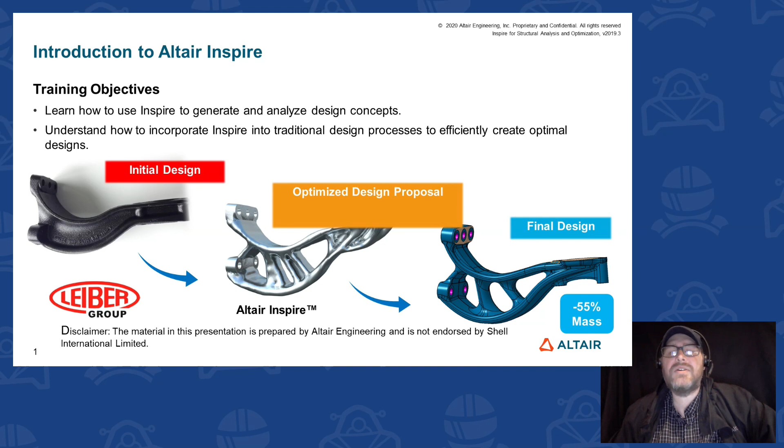So using Inspire, and we're going to show you how to go about doing this, you can take the original design. Inspire will intelligently, through a simulation-driven iterative process, determine the material that's necessary and the regions where material is not necessary. And then an engineer can take this information, engineer a part that in this case is a 55% mass reduction from the original design.

Another thing Inspire can do for you is make sure that we're adhering to design for manufacturing, a critical part of any design process. The best, most designed part ever, lightest, strongest part is completely useless to us if we can't manufacture it. And so Inspire allows us to include manufacturing constraints that guarantee that whatever design we ultimately come up with, it can be manufactured with our desired manufacturing process. So this had a tremendous weight savings and was manufacturable.

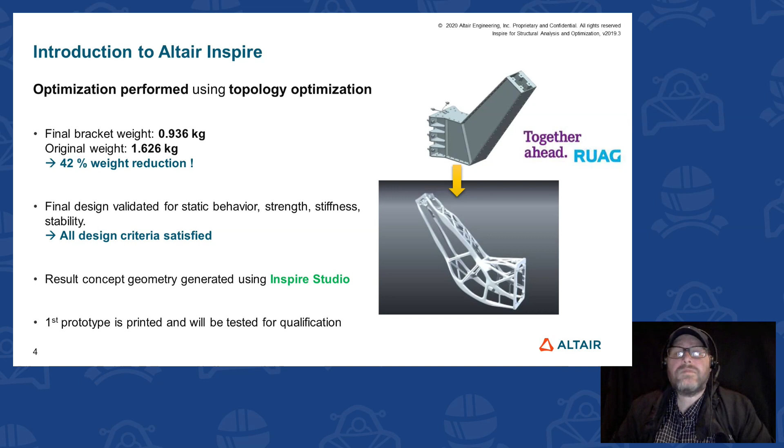So, as I said, enough of the slides. Slides are good as a brief introduction, but from here on out, we're going to go full-on demonstration, and the information that I show you should be enough to get you up and running with Inspire. So let's take it from this. Let me clear this out. So before we get into loading up a part, let me just give you a brief overview as to the structure, the setup of the software.

Now, when you run it for the first time, whether you get the free student edition or even better, a sponsorship, it's going to load up like this, and you're going to see the screen like this. One of the very first things that I always do is I come up here to View, and I turn on the model browser and the property editor. And as we get into these designs, you're going to find the invaluable information that's going to provide you right here. And yes, we lose a bit of the graphic real estate as a result of having them up, but the benefits that we get, I feel, far outweigh the loss, a little bit of loss of the screen.

So along the top, we have our pull-down menus and our ribbon selectors. We, of course, have our file pull-down where we're going to be able to create a new or open a recent. We'll see all my recents here, save things, do screen captures, alter our preferences. Edit, we have our undo and redo, cut, copy, paste. View, where we can manipulate some of our views, turn things on and off, and we do support Python as a scripting language. And then the rest of these are what we call ribbon selectors. So in kind of the way that Windows has gone, we've gone to a ribbon-based structure where each one of these different sections is going to represent a different type of manipulation within the model.

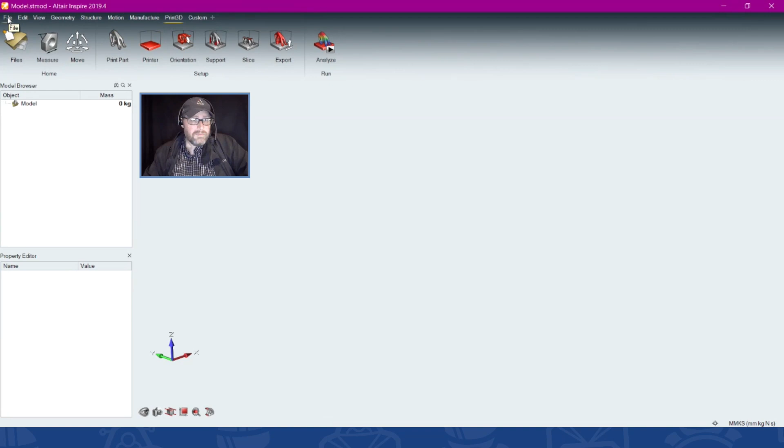But that being said, let us actually open up a model and let's get to work on this. Let's see what we can do with Inspire. So I'm going to come here. I'm going to open up a model, and just to show you, when I come to open a model, these are all of the different file types that we support. And we support the native file for any of the popular CAD systems that are out there, as well as some intermediate formats, with IGES, STEP, Parasolid, STL. But I'm just going to open up this Parasolid file that I use for demonstration purposes. And this is the file that we're going to kind of walk through the entire analysis and design process.

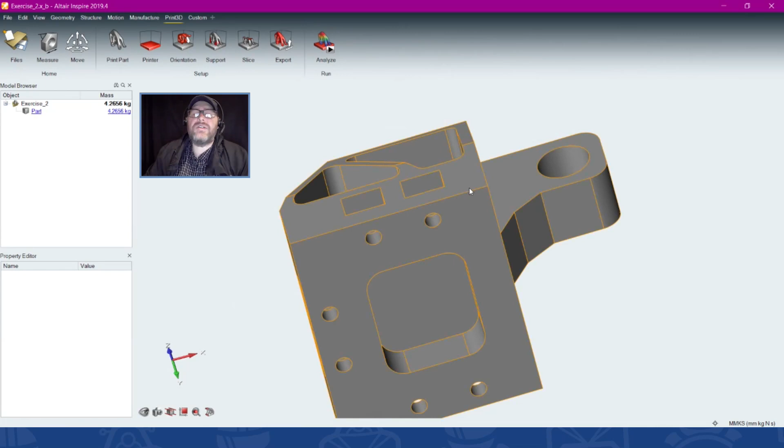So this is, if you remember that slide that showed the aircraft door hinge, this is the bracket, holds it both to the frame of the plane. Two of them are going to be aligned like this, mounted to the frame. And then two of them will be aligned like this, mounted to the door, and the aircraft door hinge will mount between them and allow that kind of interesting motion you get from an aircraft door, where it kind of comes in, tilts, goes out, and lays up against the aircraft.

And we want to see if we can improve this design. Ultimately, we're going to take this to an optimization and come up with some sort of lightweight but strong design. But before we do that, it is important, at least in the case of this part, to understand where we are at right now. We want to see the behavior of this part as the design is, and then use that information to help us build an optimization and understand the results of an optimization to make sure we're creating a better part through optimization.

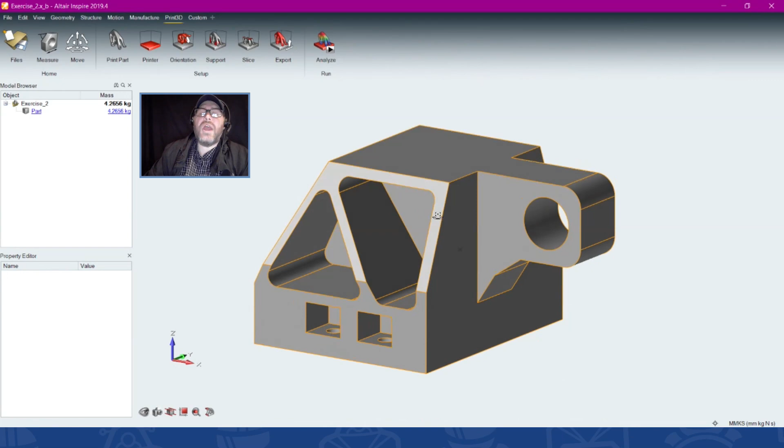So before we get into that, one of the things that people always are going to want to know is how to manipulate the model. Inspire has its own mouse manipulation parameters, where I can hold down the middle mouse button to do what we call a trackball rotation. It's rotating around that little X in the middle of the screen, and so I can rotate it like that. Holding down the right mouse button gives me a pan, so I can move it around.

And then using the scroll wheel to zoom in and out, pulling the scroll wheel towards me zooms in, pushing it away zooms out, using the pointer as focus. So whatever I hold my pointer over, that's what I'm going to zoom in on.

Now, any GUI-based software is going to have its own mouse manipulation, and it seems like every single different software out there, whether it's an FE software or a CAD software, seems to have their own different take on mouse manipulation. Everyone does it a little bit different than everyone else, which sometimes makes it rather difficult to move from one software to another. And if you've ever used multiple softwares, multiple CAD softwares, or CAD and FE software, you know exactly what I'm talking about.

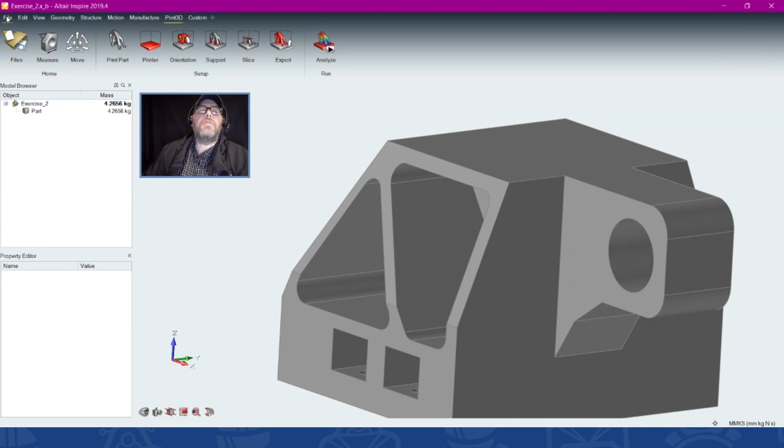But we want to make the transition from CAD to Inspire as seamless as possible. So all you need to do is come to the File pull down here, come to Preferences, and come to Mouse Controls, and you can see we can change the configuration of the default mouse, where I can make the right mouse button do whatever I want it to do, middle, left, and right, and then my manipulators here, Control, Shift, and Alt.

Or even better, if you're familiar with the CAD system, all you have to do is come up here to this default, select it. We're going to get a list of all the popular CAD systems there. And as soon as I select one of them, it's going to change all of the buttons to that manipulation style for that particular CAD system. So if you're moving from SolidWorks or Inventor or CATIA or UG or Pro-E to Inspire, that little change is going to make it a seamless transition, because you'll feel right at home as you try to manipulate your model and screen, and you won't suffer from the problem trying to move from one scheme to another.

Now, I don't use a CAD system, so I'm going back to the default. Click OK, and I can rotate it like this.

To do an analysis, the very first thing we're going to need to do is establish a material specification for this part. And you'll see over here in my model browser, if I click the part, it's going to give me a whole bunch of information. It tells me the mass of the part, 4.27 kilograms. And if I come down here, it's made out of steel. Well, this is an aircraft part, and very little in an aircraft is made out of steel. When it comes to aircraft parts, we much prefer our friend aluminum.

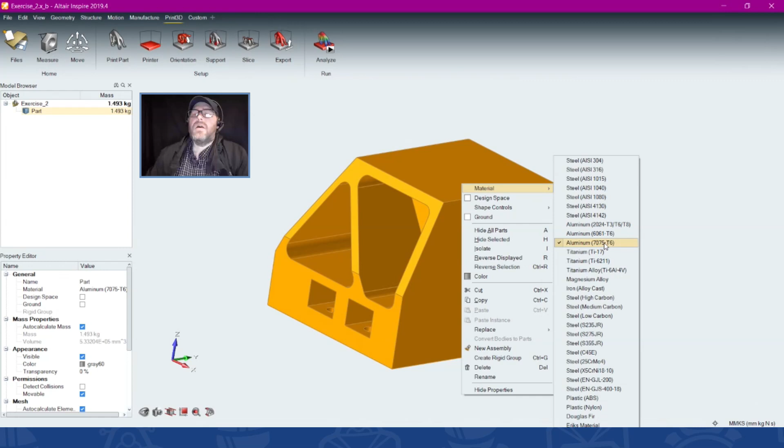But if you have a special material, or you've got the exact specifications for your material, then what I encourage you to do is come here to the Structure ribbon, come to Materials. By default, it's going to list all the parts and the material that they're made out of. I can look at the material library that comes with software, and then I can come here to My Materials. See, I have a number of custom materials for Erik's material, material 1, material 2.

All I have to do is click plus. It adds a new material to the bottom. I change it to reflect the Young's modulus, the Poisson's ratio, the density, the yield stress, and the coefficient of thermal expansion for that material. And then I have a brand new custom material.

And you see for Young's modulus, which is a pressure, it's asking for MPa, so megapascals. And the reason it's asking for that is because I am in, if I look down here in the lower right corner, I'm in the MMKS, which is the millimeter Newton second scheme with a kilogram mass.

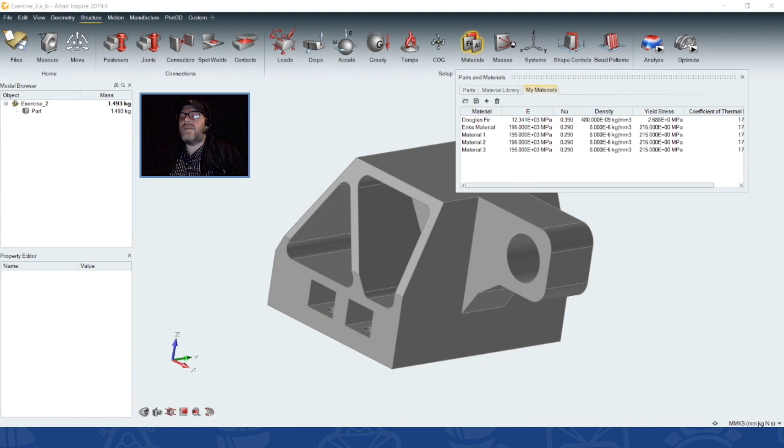If I select down here, I can change this to any of the popular unit schemes. So if I want to be working in meters, I can just come up here and pick meter Newton second. If I want to be working inch pound force second, I can do that. And all I have to do is select any of these. It will automatically update everything about my model, the material specifications, the overall sizes of the part, the loads, temperatures, everything will be automatically adjusted.

I'm going to continue working in millimeter Newton second units, so my stresses or Young's moduli will be in megapascal. When I right-click to material, you see new material 3 is down there at the bottom. By all means, add your custom materials to this.

I'm content with my steel here—I'm sorry, with my aluminum here. You can see I gave it a relatively large weight savings already: as it was set with steel, it was 4 point something kilograms, and by changing it to aluminum, I brought it down to about 1.5 kilograms.

Now that the material is defined, I need to begin to set the parameters to do an analysis on this. This is going to be a linear static analysis, the type of analysis that Inspire can do, utilizing the OptiStruct engine in the background, so we can be 100% confident in the results we get out of here.

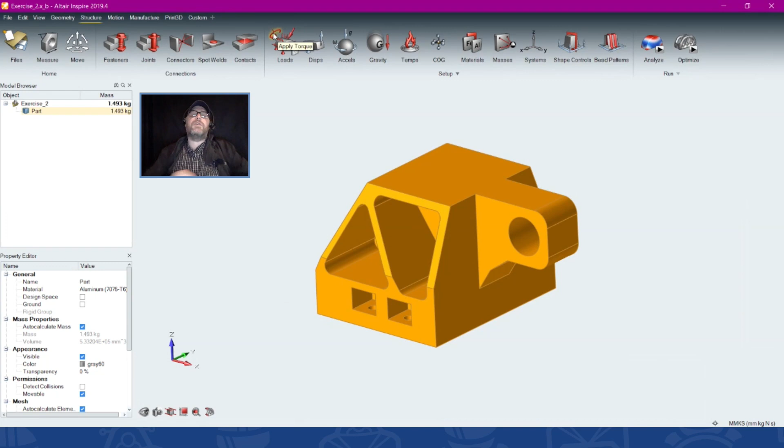We wanted nice, large, descriptive icons that told you exactly what function you were getting into. To include all the many functions within Inspire, we created these multi-function icons, which means loads, depending upon where I pick on the icon, gives a different type of load. If I click down here on the bottom, I get a support. If I click this arrow, I get a force. If I click here, I get a pressure. If I click here, I get a torque. So that one icon supports 4 different types of loads that I can put on here, and they're all very descriptive and obvious as to what they mean.

So my supports are going to be what holds it in place. If you're familiar at all with FE, you'd know this is a constraint. If I select my supports, my pointer gets a little modifier on it, a little cone, indicating that I'm now creating supports. It says I select a point, an edge, a face, or a hole. So I come here, and I can pick a face, an edge, a point, or a hole.

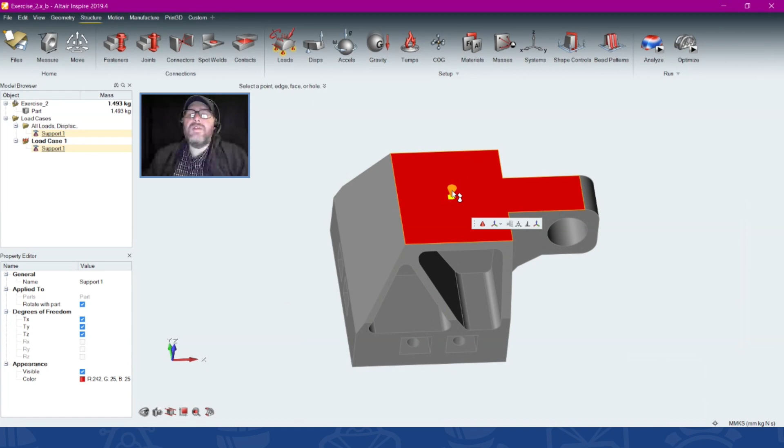I'll start by just picking a face. If I select that face, it's going to put that constraint icon right where I picked. But the fact that this entire face highlights red tells me that this icon is controlling this entire face, and it's rigidly held in place. That face is not going to move at all. It's as if I glued or welded this to something grounded, and the rest of it can deform, but it can't move.

Now, if I want to alter the configuration of that, all I have to do is double click on it, and I can free up any 1 or 2 directions, making a slightly more complex or more robust constraint. If I click here, that arrow turns green, telling me this part is free to move in what amounts to the Y direction. So we get these roller wheels on here showing us the direction it can move in.

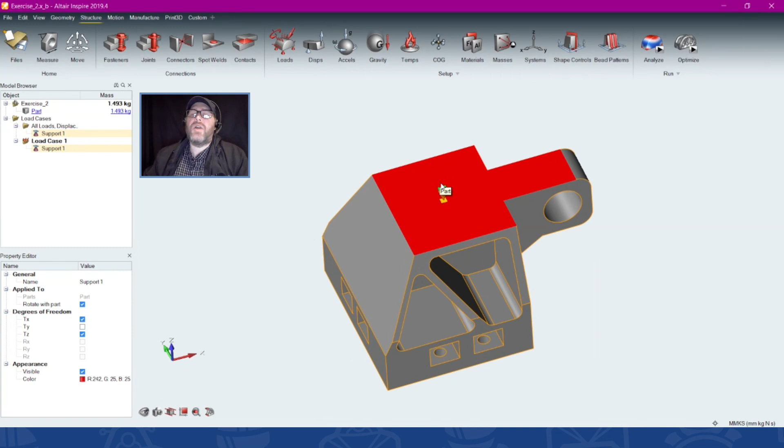If I double click on this again and grab my move support, I can orient that however I want it to be. I can rotate it in increments of 5 degrees, or type in a specific value and it will orient to that. Now you see the roller wheels are pointing to 37 degrees off of the Y-axis—so I've altered the orientation of that.

If I double click it again and pick this arrow as well, now it's free to move in plane, but not out of plane, and that's represented by this little caster wheel here. So even our icons are going to highlight and show you exactly what that is doing, so there's never any doubt as I look around my part. And I could do the same thing to a line or a point.

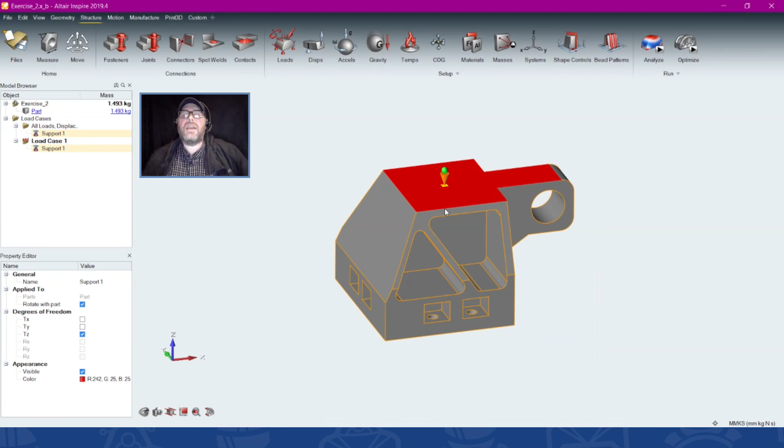But actually what I want to do, I'm going to highlight that and click on it, and it's going to go away. What I want to do is simulate how this part is mounted in the aircraft. And the way that this part is going to be mounted is it's going to bolt through these 6 holes here. I'm going to put my supports, come back to supports, and now pick a hole.

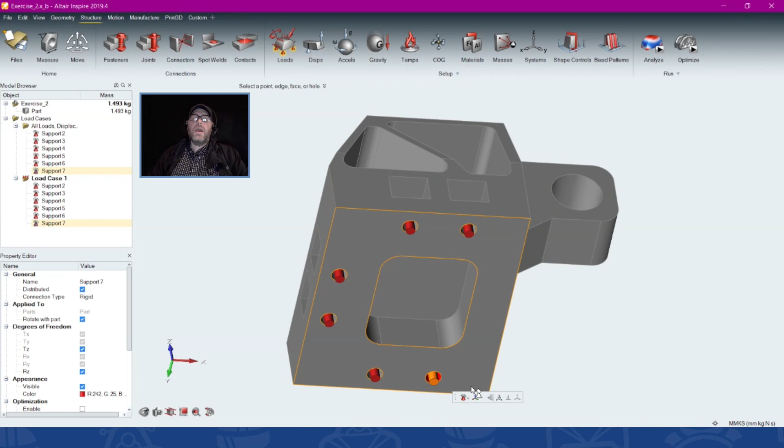You see I get the little modifier showing it's a hole, and I can click in these, and I get a slightly different constraint icon. The reason it's slightly different is because Inspire is recognizing that these are holes, and holes provide a unique constraining opportunity, because most of the time holes are constrained with either a pin or a bolt. And if constrained in that manner, that means it can never move perpendicular to the axis of the hole.

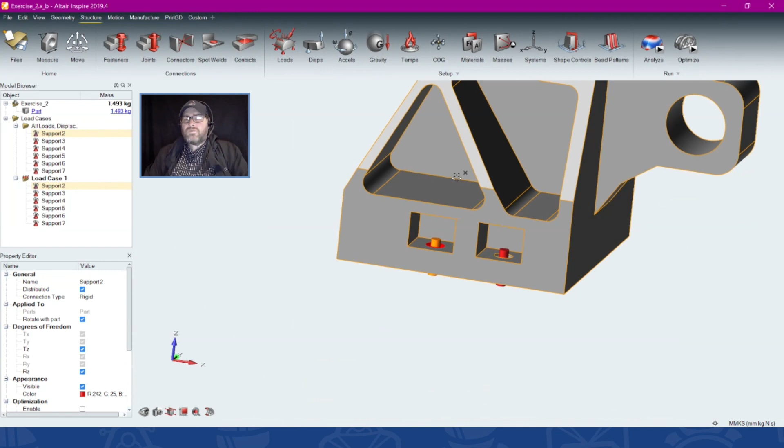But if I double click on it, you see it will allow me to free up rotation about the hole, and free up translation along the axis, but never translation normal to the axis. So I can develop a very accurate representation of whatever I'm using to constrain this part in place. And now with all of these on the holes, my part is nice and rigidly constrained, but the rest of it is free to deform.

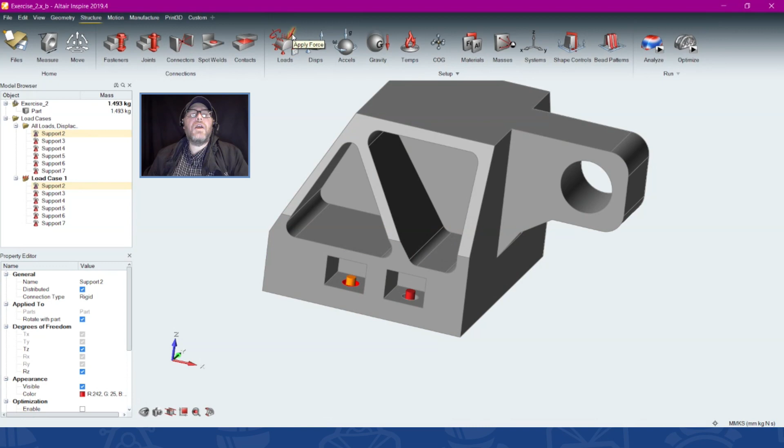Okay, so with this now, what I'm going to do is come back to my loads icon. And with my loads icon, I'm going to grab this force here, and take that and come over here, and just like with the constraint, I can apply this to a point, an edge, a face, or a hole. If I apply it to a face, a surface, again it's going to put that point there, that force, where I clicked it. But because it's all red, it's going to apply that force to the entire surface.

And this is the value of that force, 2224.110838 newtons, and that's going to be spread out evenly across that entire surface there. If I want to change the direction, just like with the constraint, I can click the move icon and rotate, orient this any direction that I want. Or if I don't know the angles, I come here, open this up, and I can put in the vector components. Now these are just for orientation, the magnitude is separate, but this will allow me to orient that in whatever direction I need to orient it.

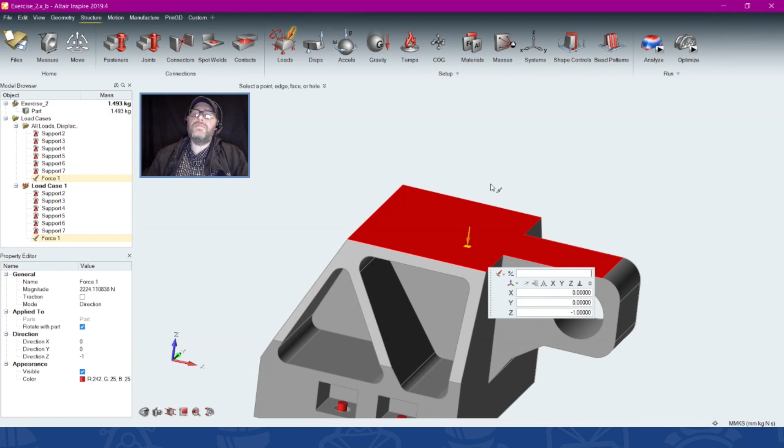I'm going to delete it though, because where I'm going to apply the load is actually in the center of this hole here. So make sure I'm on my force still. When I move to the hole, my mouse gets that little modifier showing me I'm putting a force on a hole. And if I click that, it's going to put a force right dead smack in the center of that hole. But the entire inner surface of that cylinder is going to highlight red, which means that force is going to be connected to and evenly distributed across the entire inner surface.

And I can orient this in any of the cardinal directions, plus or minus. The one I want is going to be Y minus, and then I can give it a value. So I'll type in, say, 2000 here. Click enter, and I get 2000 newtons. So I've just created a 2000 Newton load in the negative Y direction.

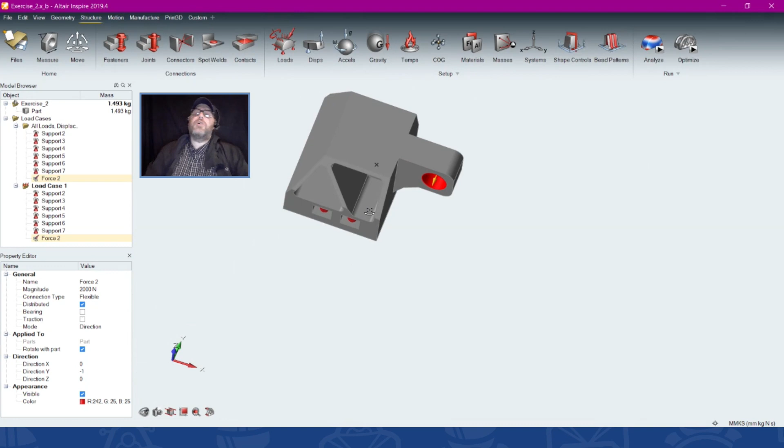We can see the vector orientation right there. And what this is going to do is represent a situation where this is mounted on the door and the door is open, so the weight of the door is going to be pulling down on this. And I'm going to see how this part behaves with that 2,000 Newton force pulling down on it.

But that's not the only situation this bracket can be in. The door is open and pulling down on it, or in flight, the door is closed, and the hinge is going to be exerting a force to keep that door tightly closed. And I want to represent that as well.

So I'm going to come back up here to my force. I'm going to click on that hole again, and it gives me another arrow, and it's in the right direction, but I needed to go positive. Now I can give this a force as well. It defaulted to whatever I put in as my default force.

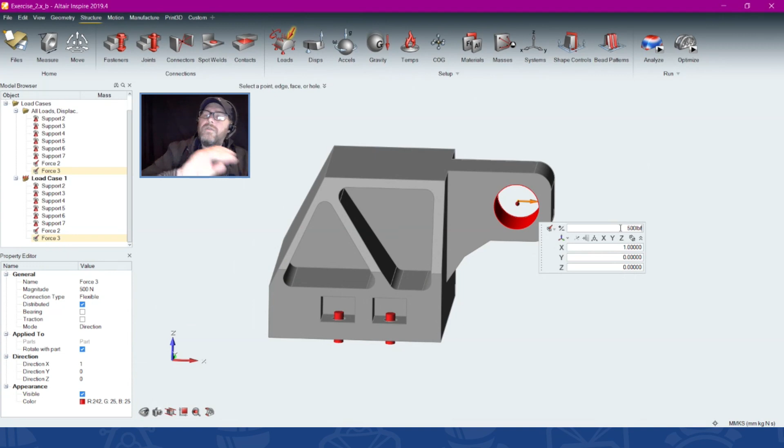But say, for instance, you don't know what that force is in newtons. You got this from somebody and they told you it was 500 pounds force. Well, if I come here and type 500, of course, and click enter, it's going to be 500 newtons. But if I do the same thing, if I come in and type 500, and then as opposed to clicking enter, type in LBF, the abbreviation for pounds force, and click enter...

...it will automatically convert that to whatever force unit I'm currently working in. So whatever unit I've got here, it's going to convert that, and that works for distances, times, masses, forces, pressures, all the different units we can possibly enter. It will automatically convert it to whatever unit system I'm currently working in. So it saves you a trip to Google to make the conversion for you.

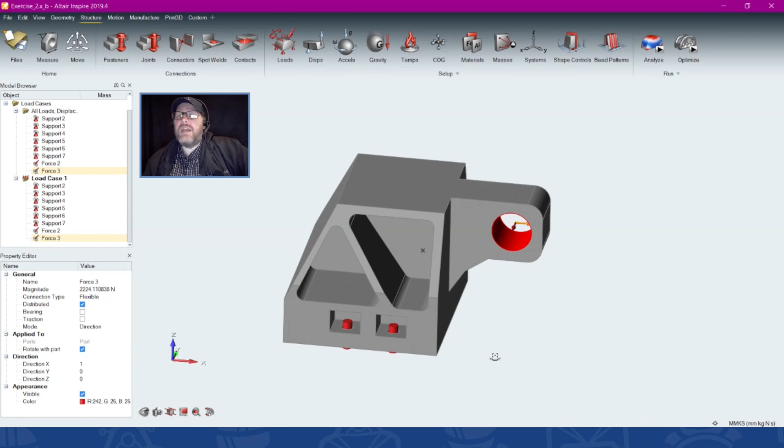So that's it. From here, I could go and run the analysis. But before I do, let's talk about some of the other ways I can load this up. This is just a standard point load. I can do a pressure load.

If I select that, it's going to apply that pressure to the entire surface, 1 megapascal to that entire surface. And now if I hover over it, it's going to tell me not only the pressure, but the equivalent force, 7,100 newtons, that's going to apply to that. So it takes into account the actual area of that. So let me delete that.

I can apply a torque. I can apply an enforced displacement. So let's say, for instance, I need to test this. We've got a part, it's sitting on an airplane, and I don't know the force that's acting on it when the doors hang open, and I don't really have a tool to measure that.

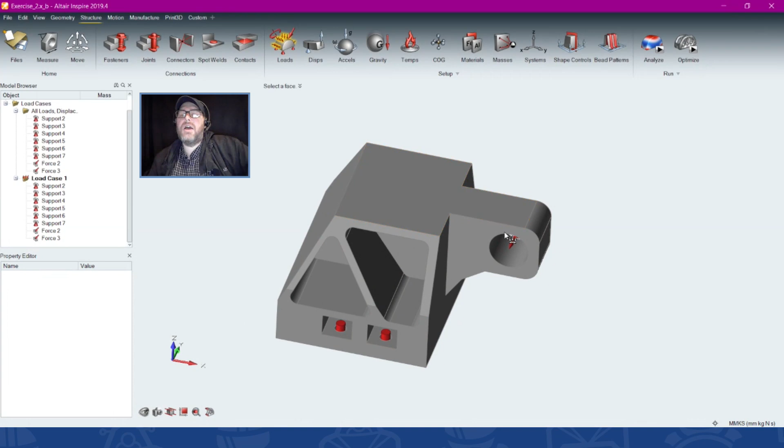But I do have somebody who can go out there and tell me that this point right here moves 4 millimeters in the negative Z when the door is open. I can click on enforced displacement, click on that point, type in 4 millimeters, indicate the orientation. And now what will happen is, even without any force on here, it's going to take that node and move it 4 millimeters, and then we can see whatever stresses result from that, not even knowing what the force is, but knowing what the displacement is.

I can do G loading. So G loading is going to be based on the gravitational acceleration. I can click that and say, okay, I want a 5G load on this part, and it's going to do that. I can do angular velocities and accelerations.

We'll get to gravity in a little bit. And I can apply temperatures. So if I put temperature on here, it's delta T.

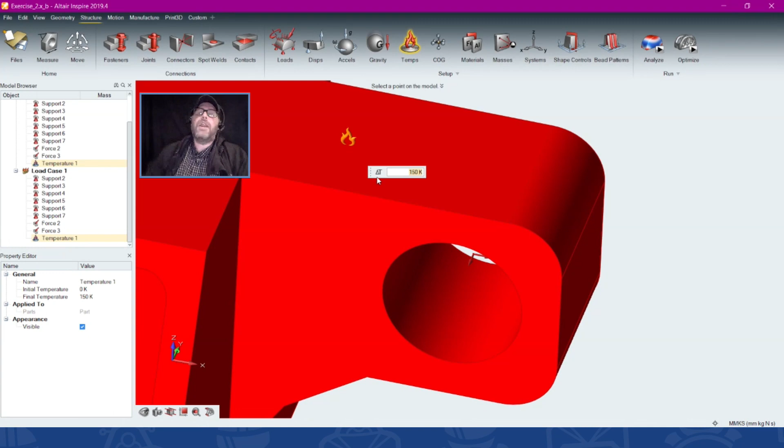So irrelevant of whatever temperature it's at right now, we just assume it to be neutral temperature. It's going to increase the temperature of this by 150K. And then as a result of that thermal load, we're going to get a thermal expansion. And because the part is deforming, we'll get a stress as a result of that. And if I had made that negative 100K, we get a contraction and we get stress as a result of that.

So we can add just about any type of force that you're looking to do. They do have to be static forces. We don't support dynamic forces in these static analyses right now, but later I'll discuss a way that you can do a kind of pseudo-dynamic analysis.

And then I can even come here and add non-structural masses. Non-structural masses are a tool when the mass of something is important, but not the direct configuration of it. Think muffler hanger - you go underneath your vehicle, there are hangers keeping your muffler from dragging across the ground. If I want to do a study on those, I don't need the complexity of the entire muffler system. I just need to know the center of gravity and the mass of it. I can put that center of gravity there, that non-structural mass, and connect it to my part, and analyze it by putting a mass there. It's another way of loading it up.

And that's pretty much it for the way that we load a model up. The next thing I do is come over here to Analyze. I'm going to click the little play button, and it's going to open up my analysis window. With my analysis window, the first thing I can do is name that analysis - very useful if you're doing multiple studies. I can control the global element size, and we'll talk a bit more about meshing. You don't have to worry about the meshing at all, it will take care of all that for you. But if you do want to control some aspects of it, we'll talk later about how you can do that.

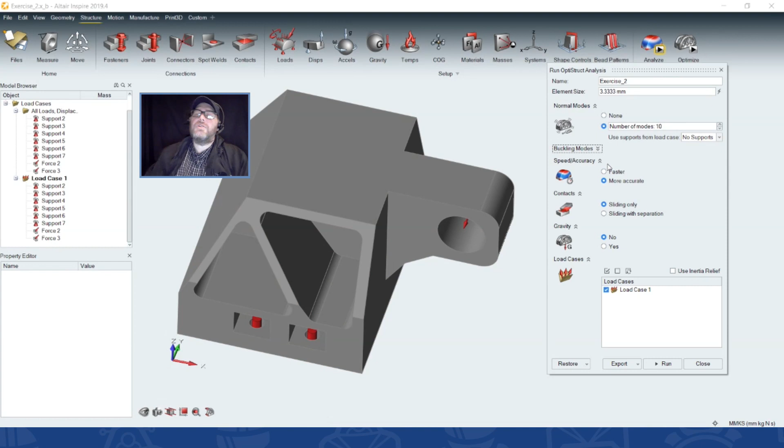And then I can do buckling analysis. So I can again request my buckling modes and which load case I want to use. Indicate whether I want it faster or more accurate. More accurate, if you're familiar with meshing, is going to provide a quadratic or second-order tetrahedral element - far more accurate, but takes a bit longer. Or I can go faster, which is a first-order linear tetrahedral element, which will get my result faster, but will tend to have more stress and less deformation because they are stiffer. So only do that if you really need some rough answers quickly, but not something you'd want to bank on.

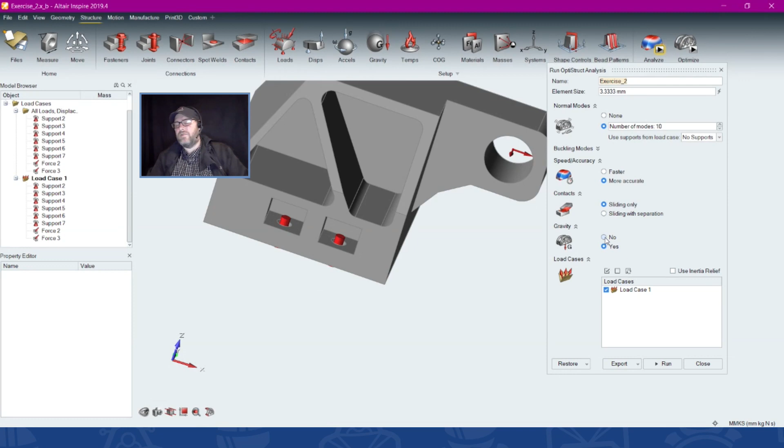We'll come back to contacts. Gravity - if I want to incorporate gravity or not, I can click yes, and now gravity will be included, but I need to make sure gravity is pointing in the right direction, so I can come back to gravity here. Orient that gravity properly, and it will default to the Earth standard gravitational acceleration. We can just go ahead and leave that. But this is a relatively compact little part - gravity is not going to have much of an influence or any discernible influence on it. So I'm not going to muddy the model up by including gravity.

And then I can come down and include the load cases. I see I've got one load case here. This load case is going to take all my forces, all my constraints, and run an analysis on it. But that's a bit of a problem. So coming back to here, I need to close this for a second. I said I had this indicating this would act when the door is closed, or be the force when the door is closed. This is when the door is open, but that can't happen at the same time. And if both of these forces are acting at the same time, I'm going to get some sort of vector result here, which is non-realistic. These forces can never happen at the same time. So before I run it, I need to come back here to my loads.

To this little chart icon here in the corner, and this allows me to create load cases. Load cases are essentially studies. I said I had a door open and a door closed. Well, I can click here, select the constraints or supports that I want, and then select the force I want, deselect that there, and now I get two independent studies. They will run in the one analysis that I do, but I will get two separate results, one for each of them. But more importantly, when I get around to doing my optimization, the optimization will take both scenarios into account into its study when it does it, still acting independently, but making sure that my part is optimized to support both of those load cases.

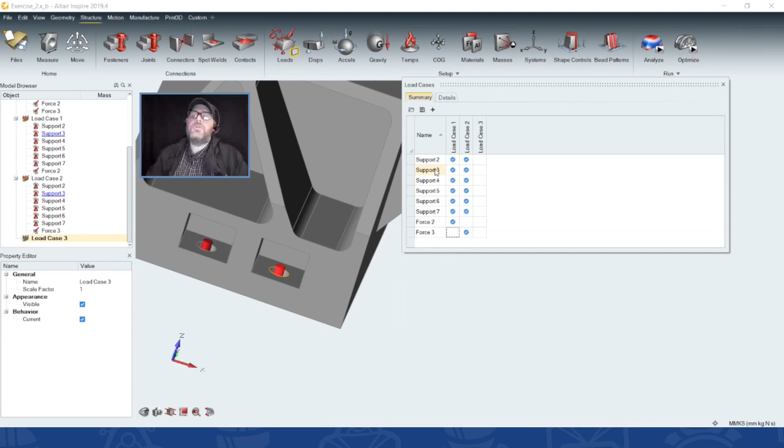And I can continue to add load cases as I want. So say I wanted to study it assuming bolt 2 and 3, my support 2 and 3 - let's pretend that they failed. So I won't even include them, I'll just grab the other 4 and that load right there, or force right there. And now I'm doing that study right there. And I can continue to add these as I see fit. And when I come back to my analysis, you see it includes all load cases and they're all turned on by default.

And from here, I can just run the analysis. So if I click run, it's going to pop up this little status window. And what's going to happen in the background is Inspire is not just a muddled together geometry-based element or meshing element analysis tool. It's actually a geometry front end for our high-end analysis, meshing, and pre-processing tools.

So what's going to happen is it's going to take this part and send it to our tool called SimLab, which is going to create a very, very high quality tetrahedral mesh. Then it's going to send it to HyperMesh, our preeminent preprocessor, which is going to set up all the parameters for the analysis, and then send it off to OptiStruct, our analysis optimization tool that we've been developing for 20-some-odd years now, to make sure that we get the most accurate results possible. So you're utilizing our high-end enterprise level software, but you're doing it in a very easy to use interface.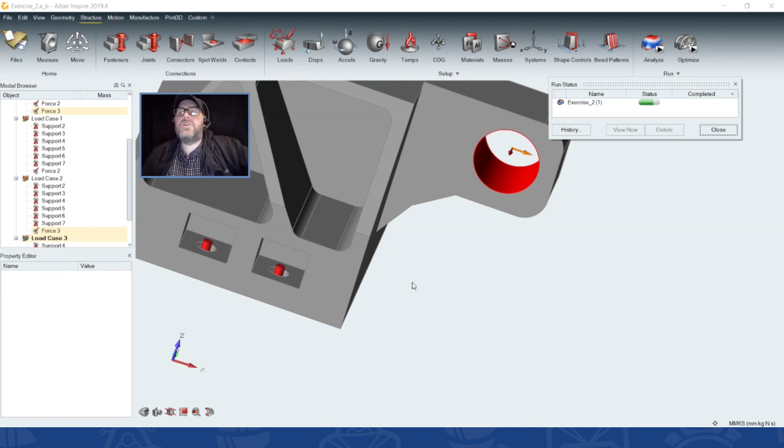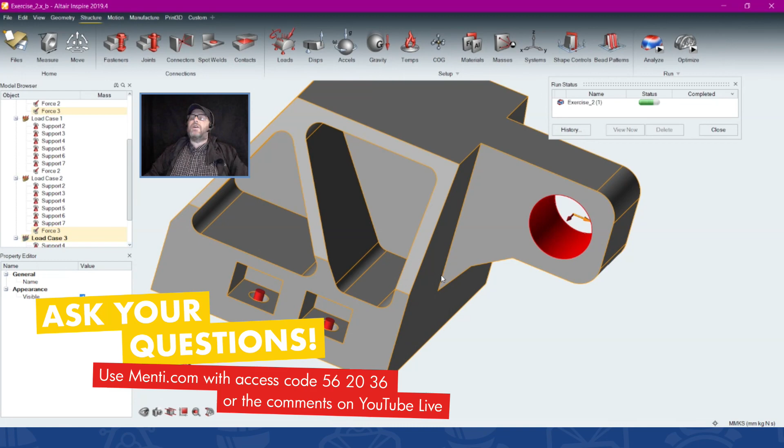And this should be just about done here. And as soon as it is, I'm going to get my little reward. A little green flag is going to pop up here, and that tells me that my analysis is done, and I can take a look at the results. What we'll do after that, we'll analyze the results. We'll determine from them where we stand with our current design, and then determine if this is appropriate to move into optimization and see if we can come up with a better simulation-driven design.

And there you go. Almost as if on cue, I get my little green flag. I click that. It takes me directly into the post-processing tool here, where I can see all 3 of my load cases plus my normal modes. I can see all the different result types I have: displacement, von Mises stress, percent of yield, factor of safety. My animation, where I can see how the part is going to behave.

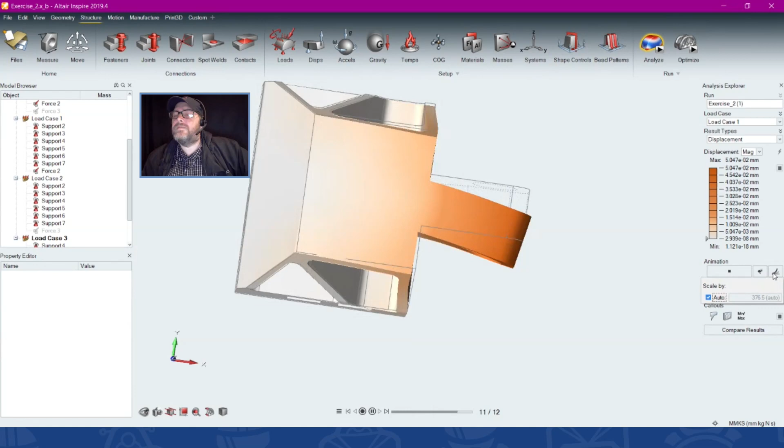And before you get a little concerned about this aircraft part, which looks like it's being made out of some sort of rubber, realize that we automatically scale up our animations. If we look here on our legend, we can see the maximum displacement we're getting is 5.047e-2 millimeters. So, 5/100ths of a millimeter, which obviously is not being represented there. We scale up our deformations so we can see them. And if I click this, you get scaling it up 376.5.

And the reason we do that is if it came up as a 1-to-1, this provides me almost no information whatsoever. To even see the deformation, I have to zoom in, and just looking at this isn't going to give me the information I need. So we take care of the trouble of scaling it up for you so that we can see the behavior of this. But no matter what your scale factor, these values here are 100% correct.

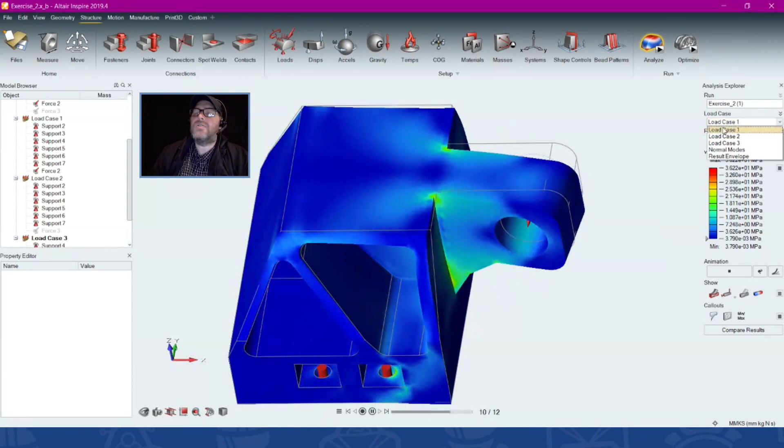I can come down to my von Mises stress, see the stress as a result of each one of my load cases and the behavior of each load case. And most importantly, I can come here and take a look at my factor of safety. So what factor of safety is going to do is compare the results that I have here to the yield stress value that I entered into my material definition. So if we come here and we look, aluminum 7075-T6 has a yield stress of 413.7 megapascals.

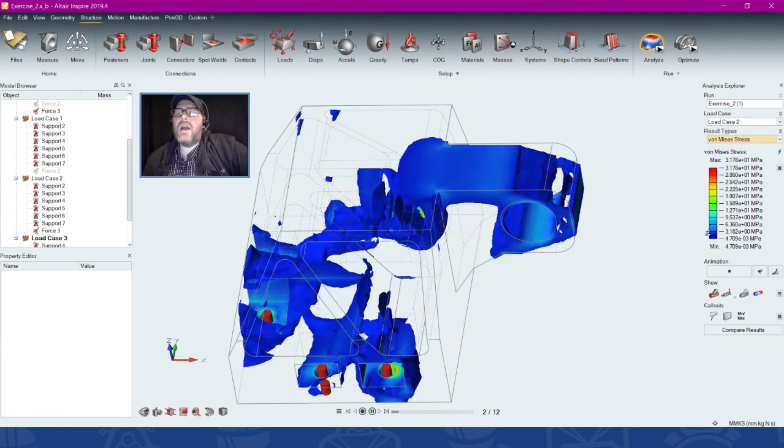And coming to factor of safety, I'm going to find out how many times higher or lower I am from that. Now I can use this little slider here, and let me come back to von Mises stress for a second. I can use this little slider to isolate values. You can see as I pull this up, it's getting rid of the lower stress values, allowing me to focus on purely the high stress values.

And if I change it to factor of safety, since for factor of safety the better things are higher, I can slide this down. And as soon as I get off the 6, the highest value on the scale here, the entire model disappears. So this is telling me my entire model has a greater than 6 times factor of safety. And while the initial thought for an aircraft part might be, wow, that's great, if only the entire airplane had a 6 times factor of safety.

Well, I'll tell you, if the entire plane had a 6 times factor of safety, you'd be lucky if you could bring luggage with yourself and the pilot, because that's all that's getting on that aircraft, because it couldn't possibly lift anymore. So a more reasonable factor of safety is typically between 1.5 and 2 times. And the fact that the thing has a 6 times factor of safety tells me one very important thing, and that is this part is way, way over designed. And there's a lot of room for improvement.

Even with the 1.5 kilogram mass of this, which isn't that much, even with that relatively low mass, this part has too much material in it. And so I can make this lighter, make my plane more efficient, and allow it to carry more cargo or more passengers, the things that pay to ride on a plane, by taking out excess material. It's a waste to fly excess aluminum around. So this analysis tells me I'm good to go with optimization.

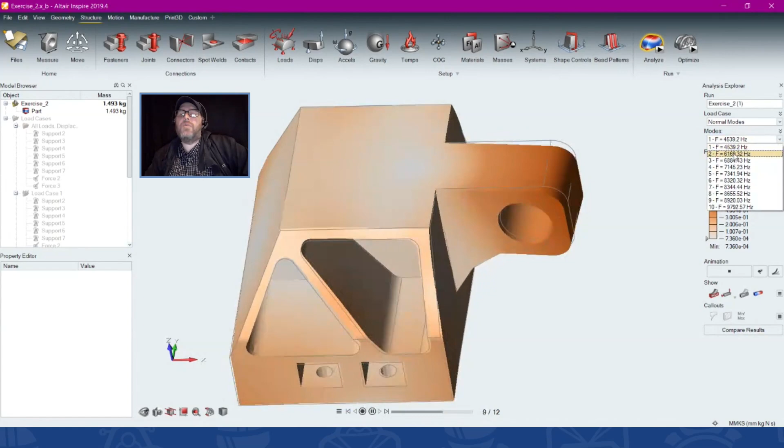And then I can see all the way up to the 10th mode. They definitely get more complex, with my absolute favorite being the 10th mode. I like it. It's kind of getting interesting there. So we can see how this part is going to vibrate at which specific frequency. So with that done, the next step would be to move on to an optimization. But before we get into that, we need to discuss one more thing. And to do that, we're going to have to kind of take a sidetrack from our part here.

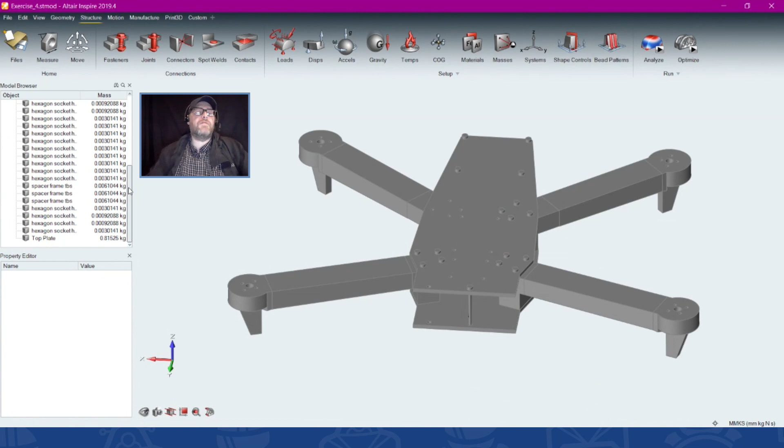I'm going to open up this part, which is a drone. And the reason I open this up is because this part is made up of about 25 or 30 different individual pieces. And so I get a lot more information in here, and I can come through and see all of these. But the big question becomes, what happens when I have a whole bunch of other pieces, other parts? How do I make sure these are going to behave as a full assembly and not as just a bunch of individual parts which are going to fall apart as soon as I try to run an analysis?

Well, the short answer is, you don't need to worry about it. Any two solids that are touching are automatically bonded together. We can visualize that in the structure tab through this contact icon here. It's going to represent all of the interfaces between all of the different geometries, all the different solids. It's going to represent them as blue surfaces. And so I know from front to back, side to side, this entire part is connected together.

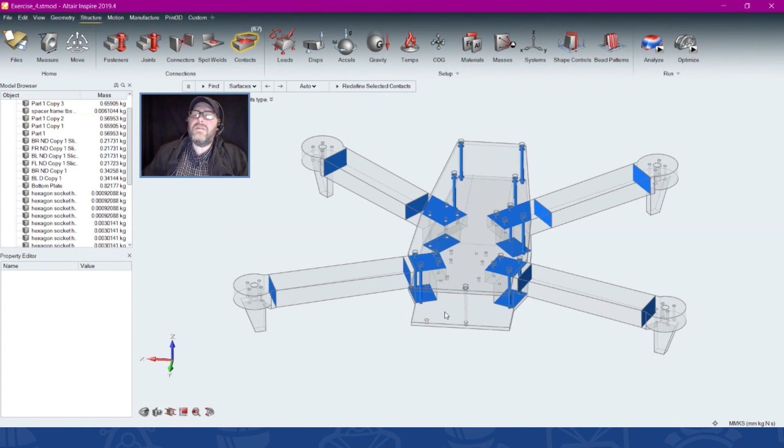I could put some constraints on here, I could put a load on here, and I would get results, because this entire part will act as if it's connected together, which is great. It means I don't have to worry about anything. But while the results will be relatively accurate, they're not as accurate as they could be, because we're going to end up with an interesting situation in this case right here. Okay, so we can see what's going on. So this is bonded to this.

That's great. Excuse me. I must be boring myself.

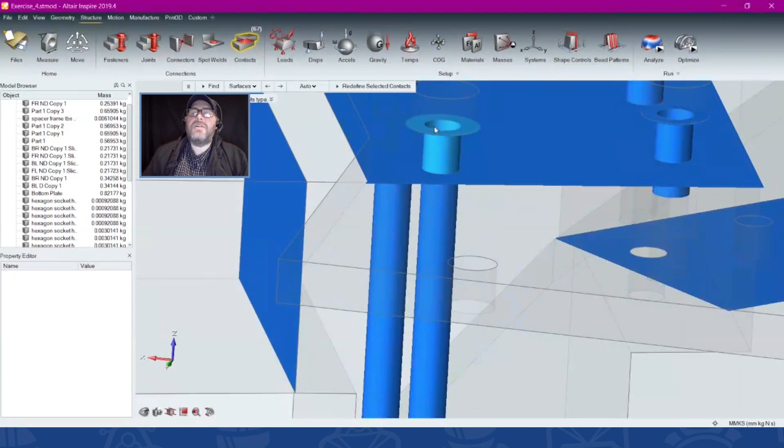That's bonded to that. That's great. But this should not be bonded to the top plate and should not be bonded to the lower plate. The load path should proceed through the bolts, which even themselves are bonded to the top plate and to all the parts they go through, because they are geometric representations. So that means that any force put on this arm is going to push or pull this surface with it, because it's bonded to it, which is not accurate.

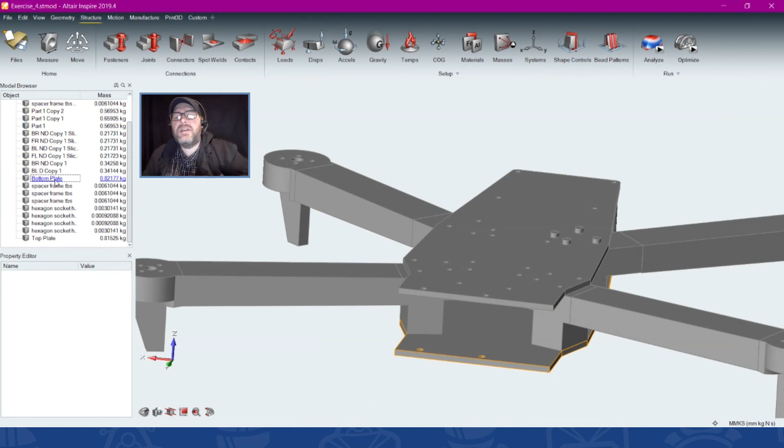So I can do better. And the key in this case to doing better is to get rid of all of the graphical or the geometric representations of the connectors, the bolts. So I can come over here to my model browser, and I'm going to scroll down, and I'm going to shift select those, click delete on my keyboard, and then grab everything that says hexagon socket and delete that. And now I've gotten rid of all of the different bolt representations, because I want to use Inspire's bolt representation.

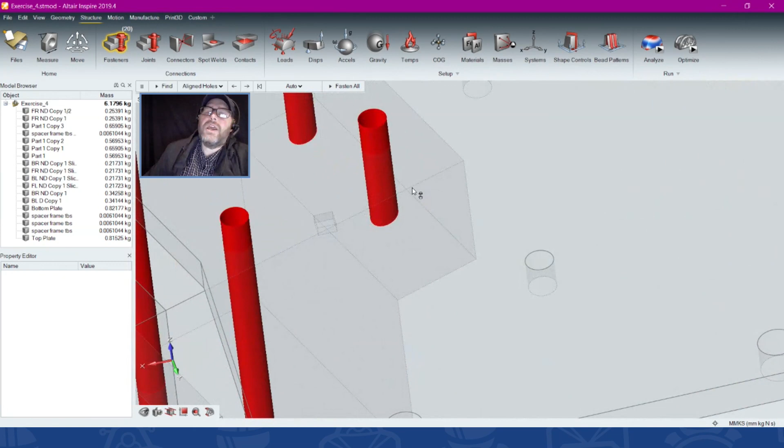If I select this, it's going to automatically find holes that are a candidate for a bolt or a screw to go through. A bolt will be applied to anything that's a through. So this runs through the top plate, through this arm, the bottom plate, and comes out the other end. And so I'm going to bolt on that. But here, I'm getting a hole through the top plate, but only partially through the end of this arm here, what we call a blind hole.

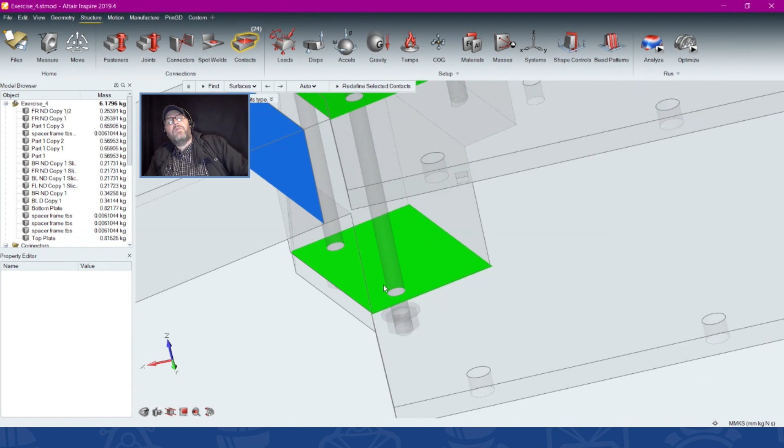And so it's going to create a screw, and when I click fasten all, I get screws in my blind holes, I get bolts in my through holes, and most importantly, if I come and take a look at my contacts, these are now green. Green is what we call contacting, or more commonly, a sliding contact. It means these two surfaces can't part from each other. They can slide along each other, and that's going to force the bolt itself to take up the load transmission as that begins to move.

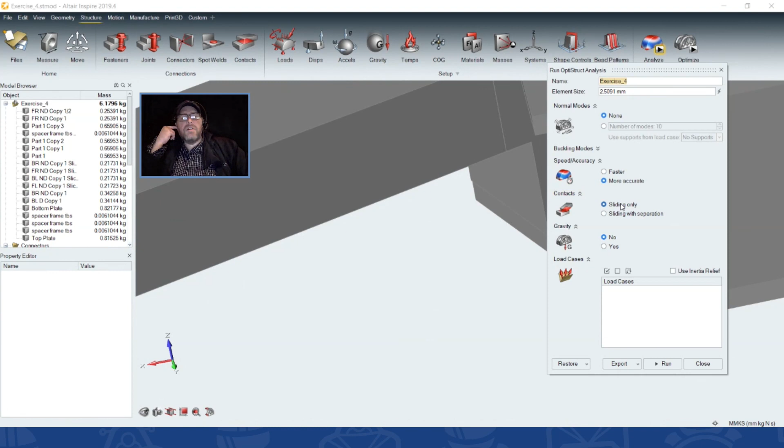Now, I said they can't separate from each other, but if I were to, say, put a significant amount of force on the bottom of this and push up, this potentially could separate from the bottom plate. But as it stands right now, it won't do that. But I can allow for that by coming back to my analyze here, or optimize, and we'll talk about that later. And you'll see contacts, sliding only, and sliding with separation. Sliding only is the default, because it does take a bit more process time to incorporate separation. But if I know that there might be separation, I can select that.

And now what will happen is it will constantly analyze the contact force here. And if that contact force goes negative, indicating this wants to pull away, it'll let it. And I'll get a very, very accurate representation of the way that that contacts. And interestingly enough, this is some pretty complex stuff. It would take quite a while in a standard preprocessor to do a lot of the things that we're just automatically doing here.

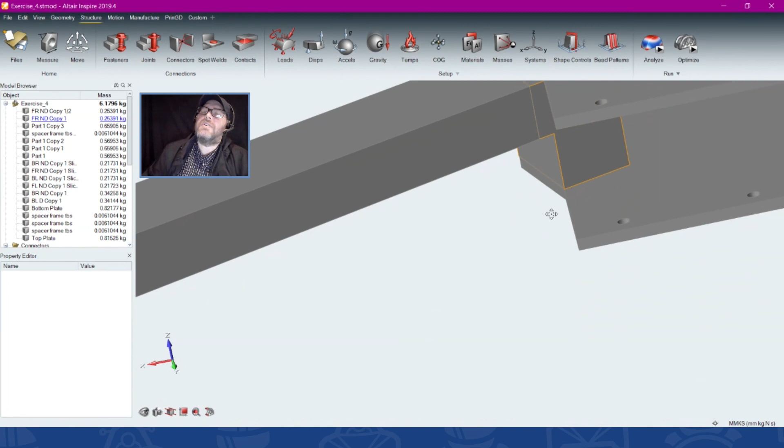One last thing, I said it's going to put a bolt through the through holes and a screw through the blind holes. The only difference between the two is the bolt is going to come through and it's going to mount at the top and the bottom, representing the bolt head and the nut. The screw is going to mount at the top, and then it will connect all the way through the blind hole portion, which is going to represent having screw threads on this. So the threads would engage with the geometry, or with the part, and we're going to represent that by connecting that screw to the entirety of the blind hole portion of the connector. Excellent.

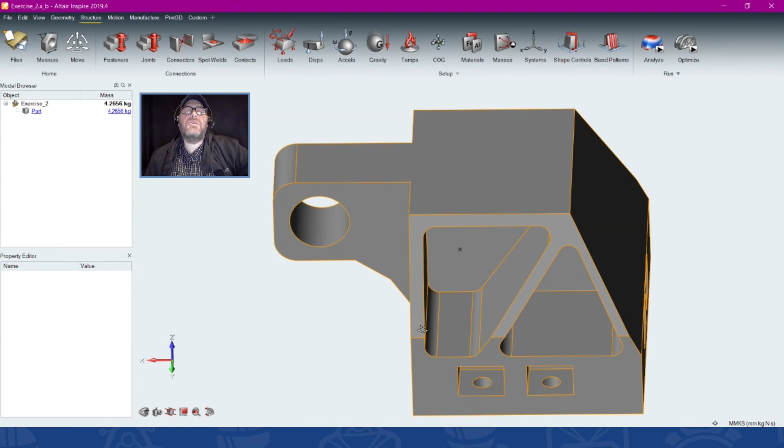So with that discussion of multiple parts behind us now, the next best thing to do is to move on to the optimization portion of this and explore how we're going to go about taking our original aircraft door hinge bracket, and seeing about coming up with a better design, because the opportunity is there to do that.

So the first thing we're going to want to do is discuss the concept of what topological optimization is. Now, you may have heard of topological optimization, you may have not. One of the key catchphrases these days is additive geometry. Or no, what is it? Not additive geometry. Can't remember the name of it. Something along those lines there.

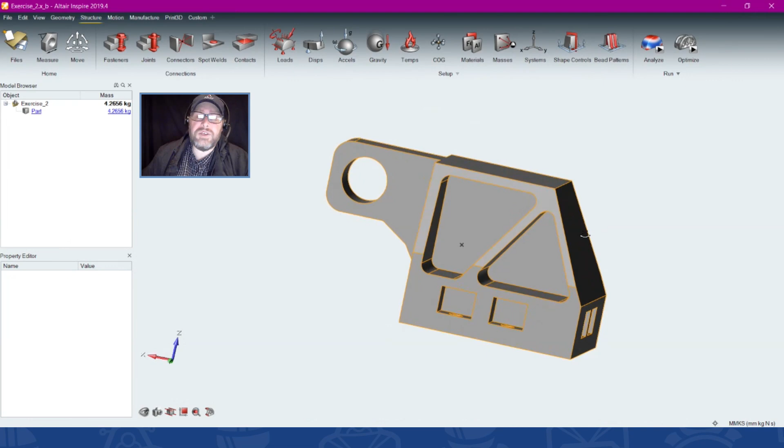But no matter what it's called, it's effectively taking a shape and determining what of that body of material is necessary to create or to support whatever requirements you put onto the part, and then get rid of the material that doesn't contribute to what you're looking for it to do. Easiest way to understand the idea behind topological optimization is to think of sculpting.

So when an artist wants to make a sculpture, they're going to take a block of some material, marble, wood, whatever, and they're going to kind of see inside of it. They're going to think that inside of there is a statue, whatever they want to represent, and then they're going to go about getting rid of all of the rest of the material that's around it. So the statue was there inside the material. The artist's job is to get rid of all the extra material. And that's exactly what topological optimization is.

Topological optimization carves away material not based on aesthetics like a sculpture, but based on the necessity of that particular piece of material to contribute to what you want it to. Generative design, that's the word I was looking for. Generative design is the new kind of key phrase that everyone's using, and essentially it was developed by people who were doing what we've been doing for a very long time, topological optimization, but wanting to refer to it as if it was some sort of brand new concept.

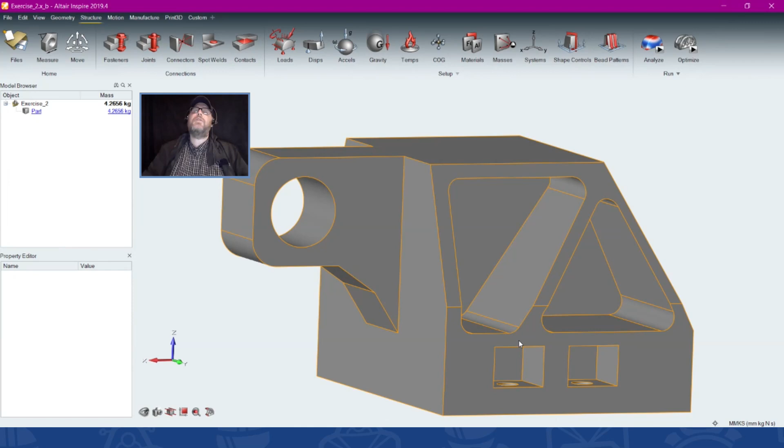So to get a good optimized part, just like to get a good statue, you would never carve a statue out of a statue that already exists. And the last thing that I want to do is optimize this part exactly as it is. I would have very little freedom for creating a part because it would be limited to the body of what I've got right here. Because just like carving a statue, you can't make a statue that's bigger than your original block of material. And you can't end up with a topologically optimized design that's bigger than the design space that you provide for it. So ideally, what we like to do is provide it with a big block of material.

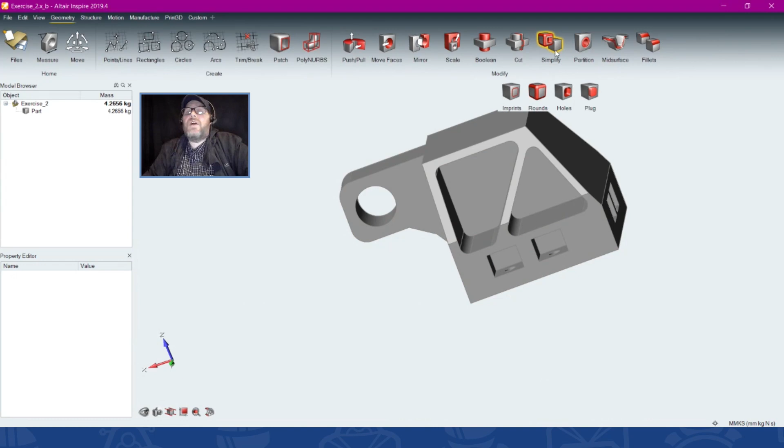And to do that, we need to get rid of some of these lightweighting features that were put there already. This could be done in your CAD system, and by all means, go ahead and do it in your CAD system if you're most comfortable with it. But I will tell you some of the tools we have here in Inspire are actually easier to use than the CAD systems. So if I come here to simplify and I come to holes, what holes does is it automatically looks for holes, and if I click on them, they disappear. They fill in.

I like that hole. I want to keep it. What I do want to get rid of is these little pockets here. It's not seeing them as holes, but if I double click on it, it finds it. If I click again, away it goes. And it makes it very, very easy to fill these in and get rid of that lightweighting feature that I don't need.

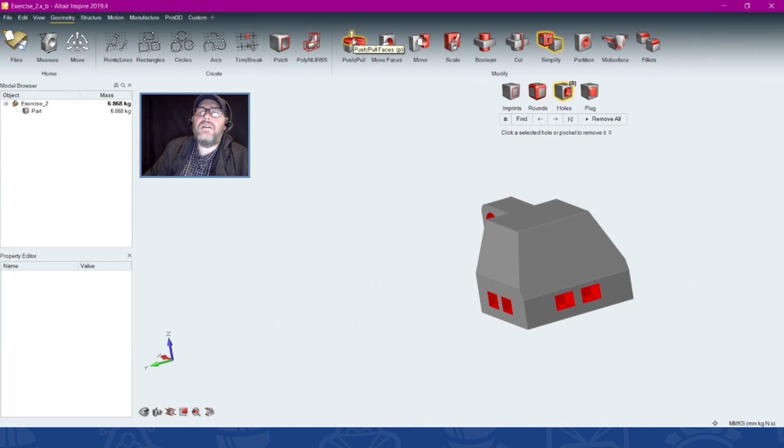Now, the next feature I don't need, they went and carved off these corners, again, to lighten it, get rid of some of the excess material, perhaps with a little bit of engineering behind it, in a lot of cases arbitrarily, or just what looked good, or run an analysis, and if it's blue, doesn't have any stress, we just cut it out. But I want to do this with simulation, so I'm going to pull these out, and I can do this with push-pull. Push-pull allows me to push and pull a surface, and if I do a slope surface like that, it'll bring it out to a corner.

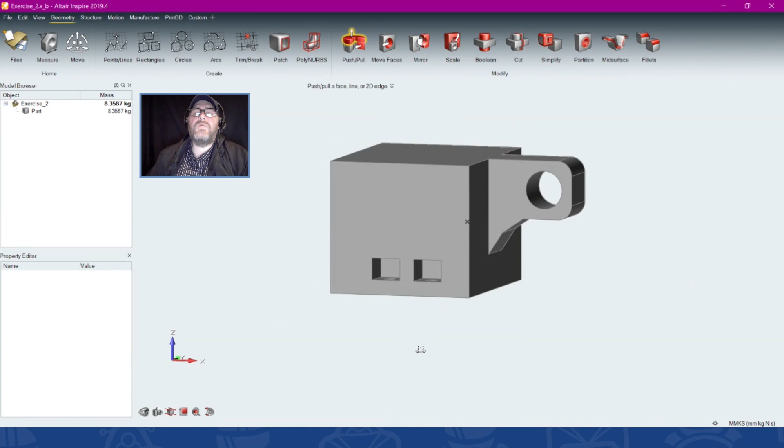And now I have a nice big block of material like I'm looking for. And this is an ideal shape for optimization. Big, bulky block of material that's going to allow the optimization tool to carve away the unnecessary material. I don't want to muddle it up by putting fillets on here. That I can do after the simulation phase. The more features you put on there, the longer it will have to run, because it will have to create smaller elements to accommodate that.

So I create a big block of material. But what I don't do is I don't put material where it would interfere with something else.

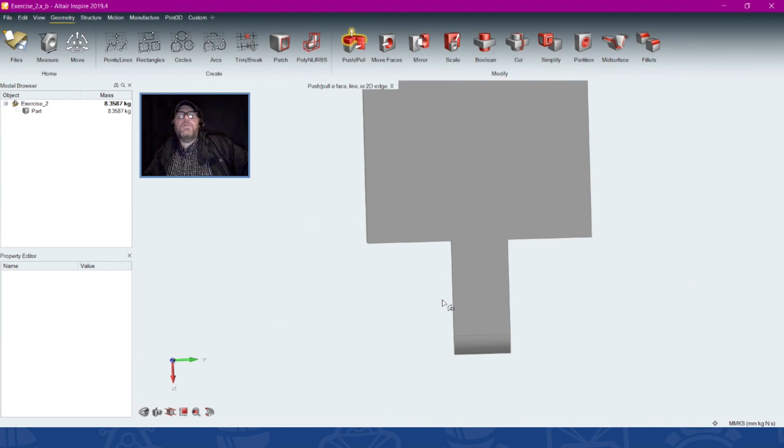That door hinge is going to mount on here with a clevis mount. It's going to come down here, over here, and up here, and a pin is going to go through here. So I'll leave these devoid of material because I can't have material there or it would interfere. As that rotates, the hinge is going to slide in underneath here, so I need this to be free of material to make sure it doesn't interfere. I need these little cubes here to be free of material, not because I necessarily need a cube, but I need to make sure there's no material there.

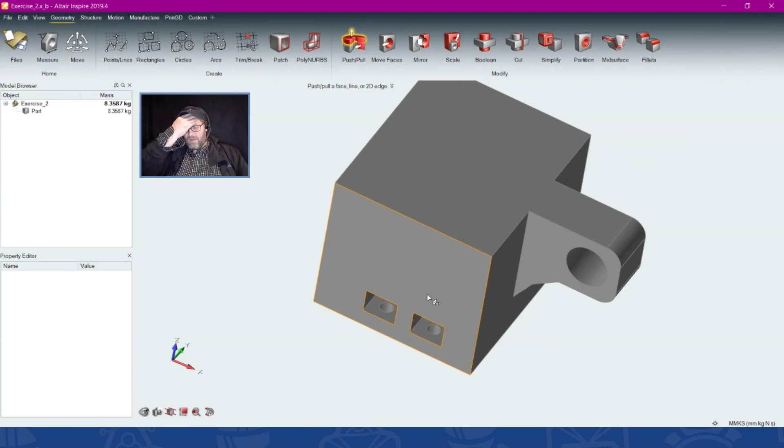So I put my wrench in to grab the top of the hole, drop the top of the bolt there. I have something to grab, I get a wrench in there. I don't know whether I'll end up with a cube here, but just not having material there is enough. So you put in as much material as you can and leave out material that's going to interfere with something else. You fill the design volume.

And so this is a great design space. The optimization code, when we get to setting that up, is going to carve away at this material, revealing the part within that has the least amount of material to achieve whatever goal I ask from it.

But one problem I have is this will carve away material. But what about my hole here? If I don't have that perfect cylinder there, I'm not going to be able to properly mount the door hinge to it. And if I don't have this perfect cylinder here, I'm not going to be able to put a bolt through and tightly lock this in place.

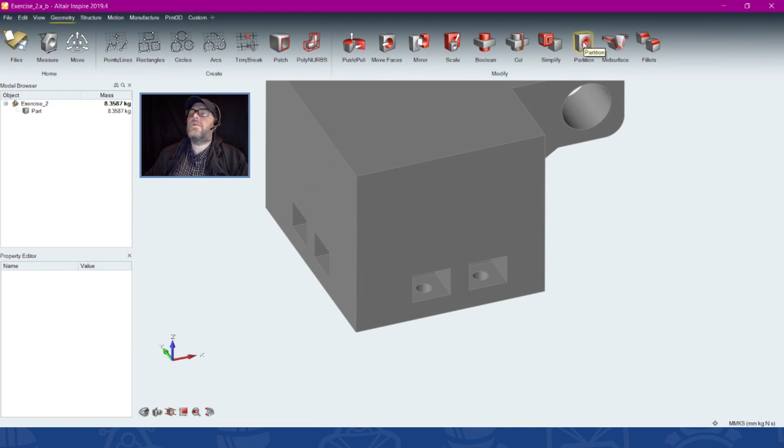There are regions of our model that are critical to the design, and we're going to need to segregate those out, partition those out using this tool right here. If I click partition and click that, you see it builds this little buffer, this little partition around there. I can say how thick I want it to be.

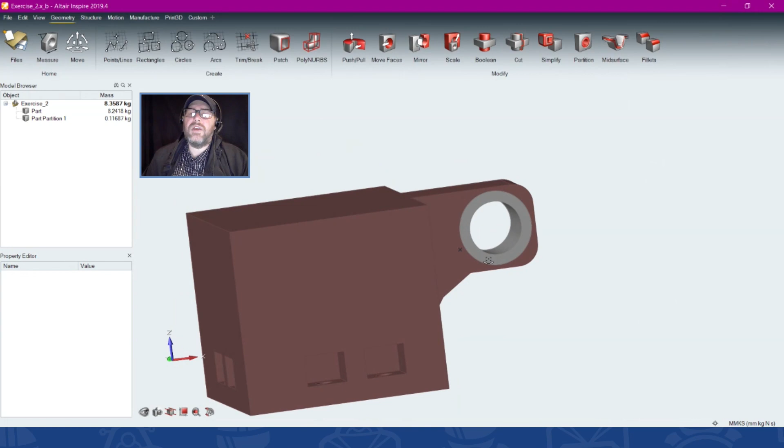Now it's a fully separate solid from the rest of my part, but we know, as discussed before, it's connected because it's contacting it. This is entirely separate solid, which means I can right click on the main body here and indicate that as design space, that which the solver can carve away from. But this gray region here is a no-touching zone. It cannot touch that, it has to be left exactly as is. So I can preserve my non-negotiables. Typically these are the regions where I'm loading or connecting this part to something else.

And speaking of connecting to something else, I can't lose these holes down here, so I'm going to come back to my partition. Because of the way it's detecting this entire feature, if I were to click that, it actually builds this partition around the entire box and my bolt hole. And I don't need that. I don't need to protect that box, I just need that box to not have material in it.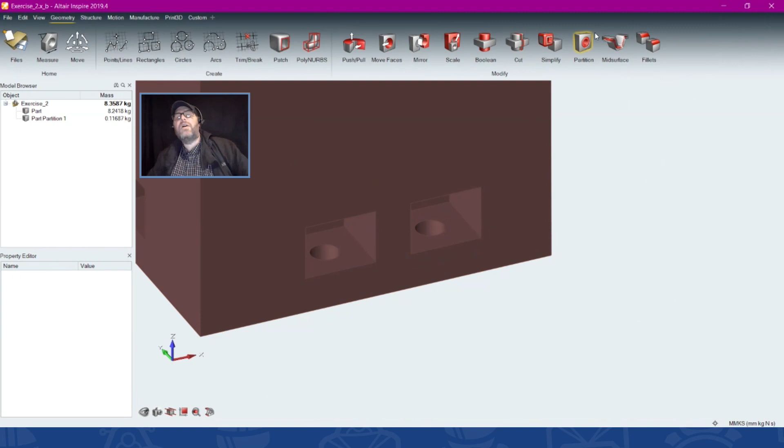So I'm going to come to my partition, and a little trick we have is to just separate this from the rest of it by holding my control key down. You see I got that little minus there. When I select these two surfaces, they go away, and now I can pick that, and I just get those little sleeves. Same thing on these two, one, two, one, two, and rotate it around here, one, two, and one, two.

And now I have a perfect part for optimization. I've protected my important locations, I've expanded my design space out to fill the entire possible volume I can have, and I'm giving the optimization code all of the tools it needs to develop a topologically optimized, lightweight, strong part.

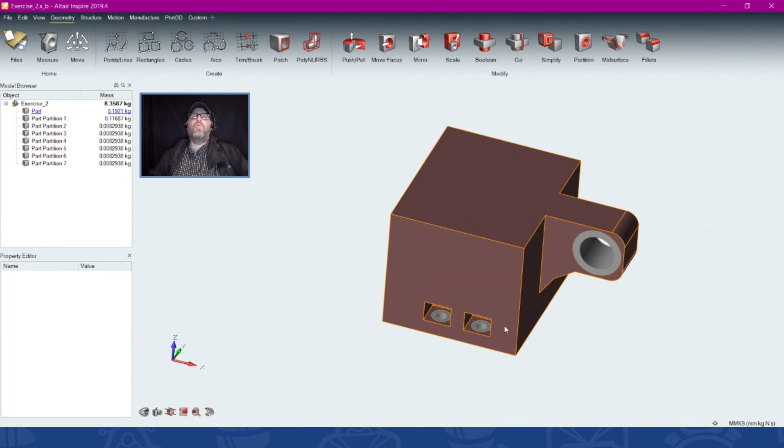One last thing I'm going to do before I actually set up the optimization is to come back to my structure tab here, and take a look at this right here, my shape controls. First and foremost, my manufacturing controls. I said a part is useless if we can't make it.

And these allow us to specify limitations based upon the standard methods of manufacture, which are casting, stamping, and extruding. We even have an additive constraint, but we'll get to that in a second. So the three main manufacturing processes have always been casting, stamping, and extruding.

Casting and stamping have a limitation because a die is involved, and you're either wrapping or shoving material and bending it into the die in a stamping process, or filling that die with a liquid or semi-liquid material and allowing it to cool. Somehow we need to get the part out of there. The only way we can do that is to have draft angles, which allow that mold to come off, working against the draw direction.

In this case, we've got a split draw where we've got two shapes coming together, and so it can go out, but those regions that are angling out have to meet at the parting line.

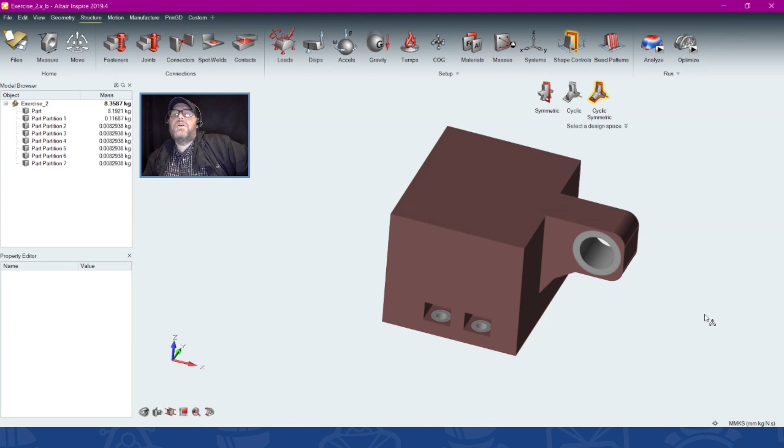Symmetry, we come to symmetric. If I click my design space, it's going to put these planes of symmetry there. And what's going to happen is it's going to try to, as best as it can, maintain symmetry on the part. Now, it's not going to do a real good job in the z-axis because it's not symmetrical that way, and it sure as heck isn't a very good job normal to the x-axis.

But the y-axis is what I want. I want to make sure that this part is interchangeable. I want to make sure that I can flip this part over and use it on the other side of the aircraft. I want one single part for both the frame and the door mounting on the port and starboard sides of the aircraft.

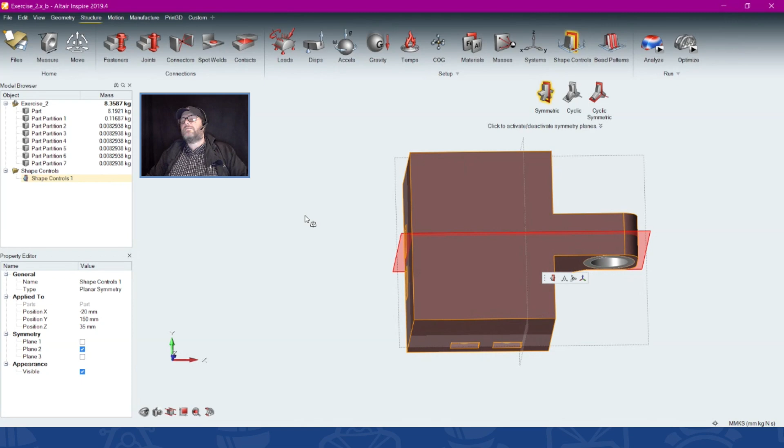So this will guarantee that across this plane, my part will be symmetric, and most importantly, because one of my loads is coming in this direction, which would strengthen this side of it at the expense of this side, this guarantees that it will be symmetric.

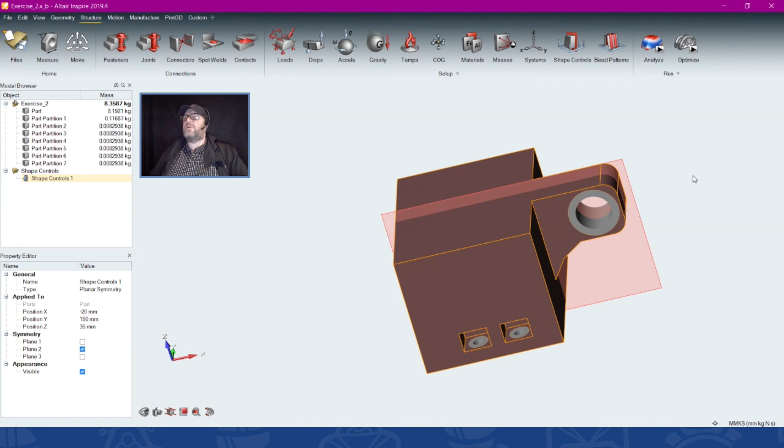Now, because I brought this up, I lost my loads and my constraints. I just brought it up as geometry again. And I'm not going to bother going through and recreating them because time is short here, and we know how to do that. I'm actually not even going to run the optimization. The optimization goes pretty quick, about 5 to 7 minutes, but it's 5 to 7 minutes we don't have. So I'm just going to talk about the optimization parameters.

Then we'll see the results and wrap this up pretty shortly here. But we need two main things for an optimization: an objective, which is what we're shooting for. The two objectives we're going to talk about are maximize stiffness, where it's going to try to make the part as stiff as possible, and minimize mass, where it's going to try to remove as much mass as possible.

Well, the other thing that we need, because optimization can be tricky and can be sneaky, is a constraint, a limitation. And the reason we need that is because if I were to say to the optimization code, make this part as stiff as possible, it's going to look at this and say, oh, there you go, it's as stiff as possible. Well, the most material is going to be the stiffest part possible, so it's not going to do anything. So to keep it honest, I need to provide some sort of constraint, and the constraint for a maximized stiffness is a mass target.

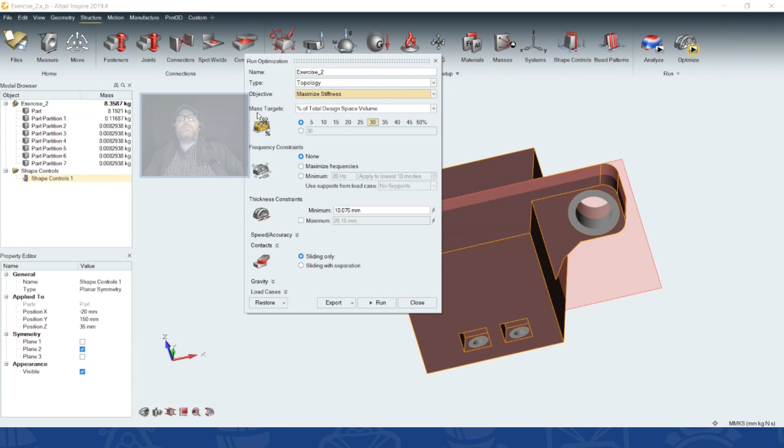What I'm going to say is I want this part to be as stiff as possible, but you only get 30% of this entire red volume to do it. 70% of this volume has to be thrown out, and the remaining 30% has to be distributed in a way to make the part as stiff as possible.

And after many years of experience, we've determined that 30% is a good starting point, which is why it's default. But you could find out that it's not leaving enough material or it's leaving too much. So you can run iteration after iteration, altering these.

The other option is minimize mass. And in this case, now I'm not telling it how much to get rid of. I'm saying get rid of as much as possible. And again, I'm left unconstrained. It's going to look at this and get rid of the entire design space and say, there you go, there's your optimized part. So we have to keep it honest by putting some sort of constraint in there, a limitation.

And in this case, the constraint is a stress constraint, or more specifically, a stress safety factor. So I think we're going to use 1.5 on this. What's going to happen is it's going to take that yield stress in the material, divide it by 1.5, and say, I cannot see stress above that value. So as it begins to remove material to minimize mass, less material means higher stress. And if it starts violating that 1.5, it's going to leave material there and seek elsewhere.

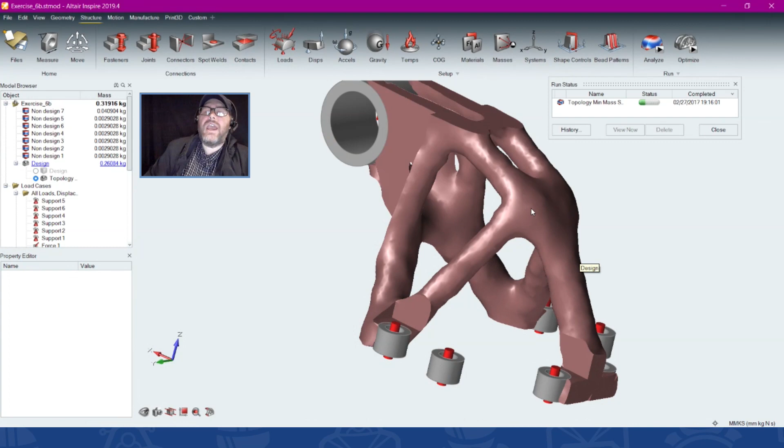And this will take just a minute to run the analysis. And while it's doing that, what I can also do is, right now, my non-design spaces are geometry, but the rest of this is still a mesh. To get this out of the software and into a CAD package, it's as simple as double-clicking on it, clicking Fit NURBS, and it's going to NURB the geometry in there. This is now geometry, and I can bring it into whatever CAD package I want.

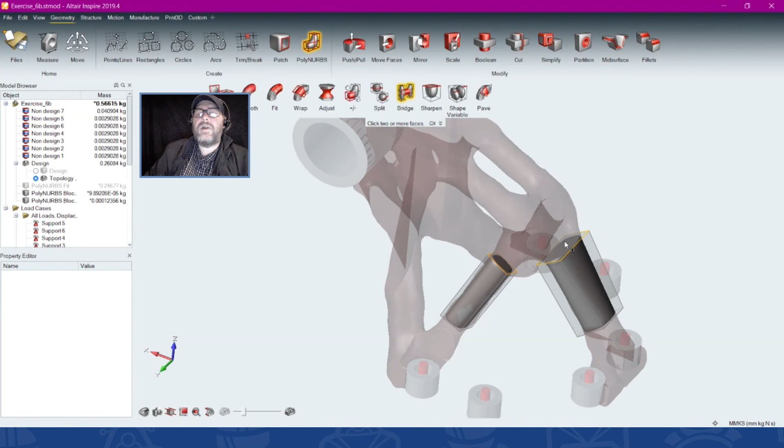Of course, it's going to be a little slow getting out of there because I've run an analysis at the same time, and you can see that that's now my part. My other option would be to manually generate polyNURBs. I get a little bit cleaner polyNURB by doing a wrap, and it'll detect the cross section. I can draw these little tubes here, and then bridge them together by selecting surfaces, and it will fill the part, and I would fill the rest of that in.

Turn off these polyNURBs because I've got my results, so we can see how well this part survived. You'll see we have a fair amount more stress on here, especially in the little angles, the little corners. That's okay though. I left those corners sharp intentionally because I know I can resolve them by filleting this afterwards.

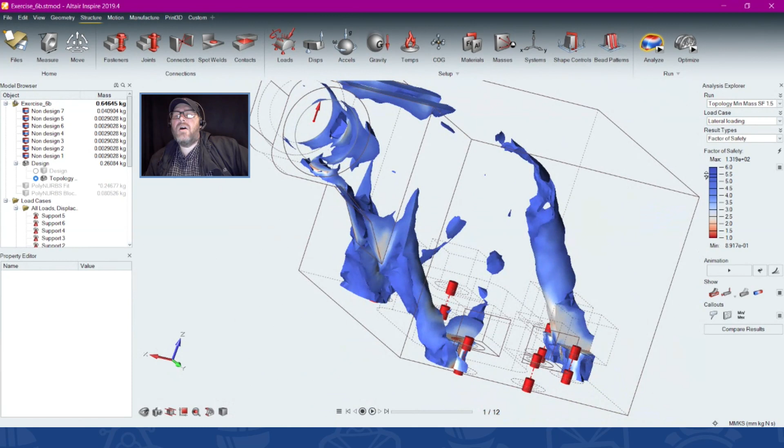The most important thing is if I come here to factor of safety and I begin to bring this down, you'll see I've got a lot less factor of safety. Not all the part is over 6, but the critical and key thing is as I get down here to 1.5, which was my limiting factor, just about all of it is gone except for these, which again I'm going to limit by putting a fillet down there.

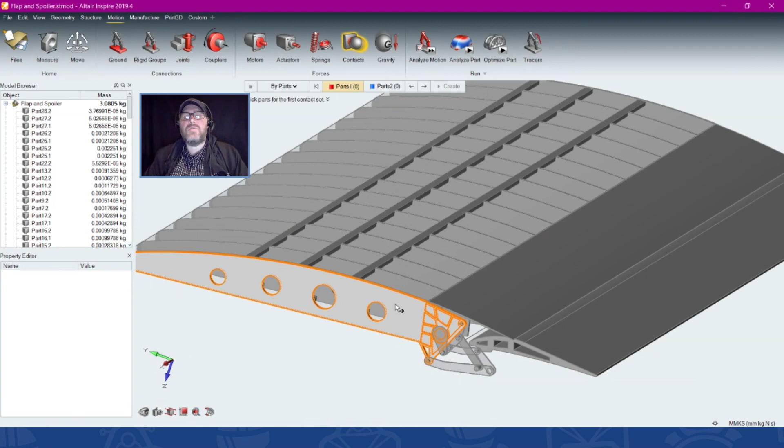This is our motion analysis, and I've coupled this with an analysis. Oops, I need to come to motion. When I create my motion analysis, I can couple that with a structural analysis, but the contacts within here, when I create a contact between something and something else, so I'll create a contact between this and say this, you'll see in here,

when we're doing motion analysis, I can enable friction and specify both the static and the dynamic coefficient of friction, and when we transition from the stiction, as they call it, from static to dynamic. So I can actually get a very accurate representation of friction if I'm doing a motion analysis.

And the motion, unfortunately, would take an entire hour and a half on its own to go into. But that Altair University website I showed you in the beginning is going to have a ton of data on how to do motion analysis, or if you register for a sponsorship, we can arrange custom classes for you, even visitations, to help you use the motion analysis, which can then be coupled with analysis and optimization as well.

Thank you so much, Eric. Yep. A question that came in, and maybe you can help, because I'm not exactly sure what it refers to: is this archive able to download? I'm sorry, Norman, could you repeat that? You broke up there. Is this archive able to download? So what the question is probably referring to is the material that you've shown, is this available as tutorial material?